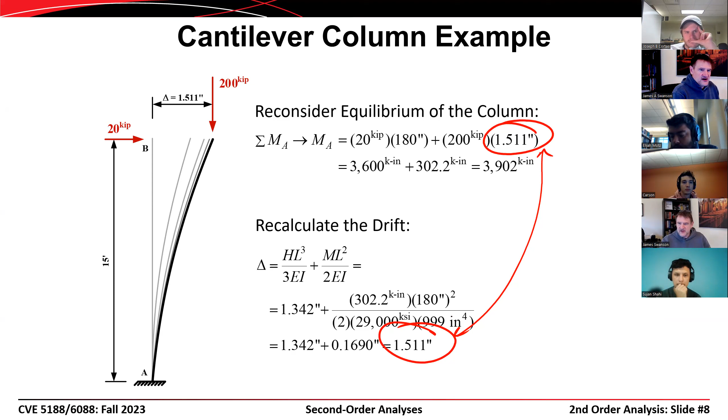And then we went on and talked about the idea of leaning columns, where we have one column here that's a lateral column, column AB, and a second column that is a gravity column or a leaning column, column CD. And so the takeaway from this was that when we have a combination of those two different types of columns in the same frame, the stability column ends up seeing second order effects, not only from loads that are directly applied to itself, but also from loads that are applied directly to the gravity columns as well.

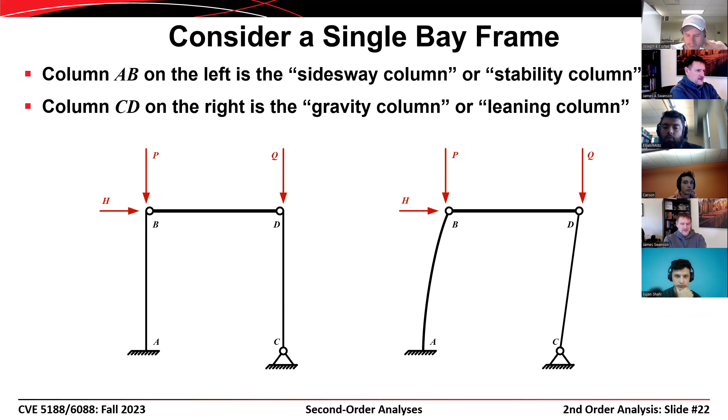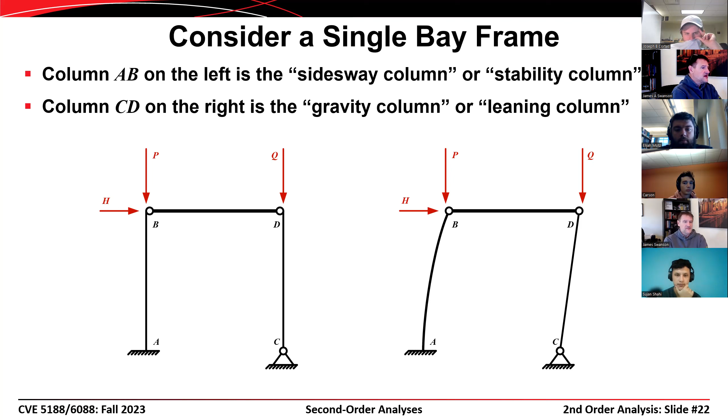And so when we look at a structure, it's important to account not just for the lateral framing, but we also have to account for the second order effects that come in from the gravity framing as well. And we went through and did some mathematics on this. We considered equilibrium of the leaning column at first, and then we considered equilibrium of the stability column next. And we figured out that the P delta effects were the same as if all of the gravity load was applied to the side sway column.

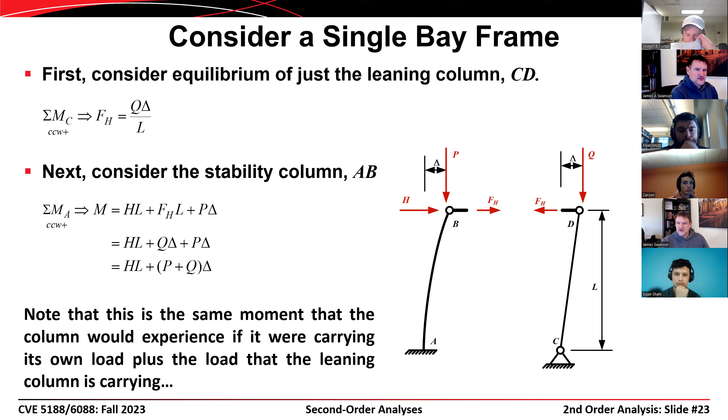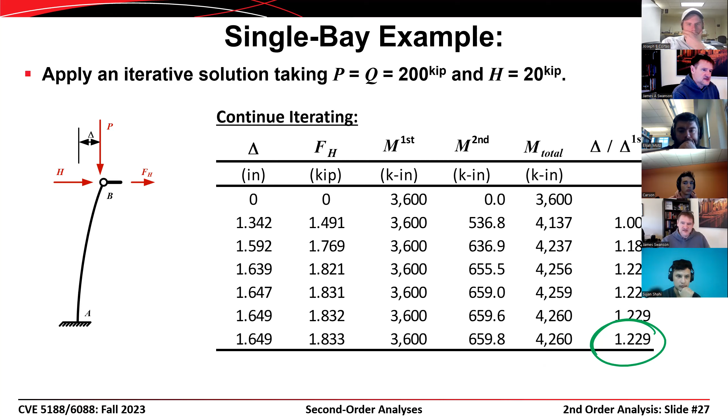And we went through this with an iterative solution and figured out that the level of second order effects was on the order of 22 or 23%. The ratio of delta second over delta first was 1.229 based on my hand calculations. Then I showed you some SAP results. Here's the hand calculations, here's SAP results with the shear deformations suppressed, and then SAP results with the shear deformations included. And we end up with the ratio of delta second over delta first in the range of 1.2.

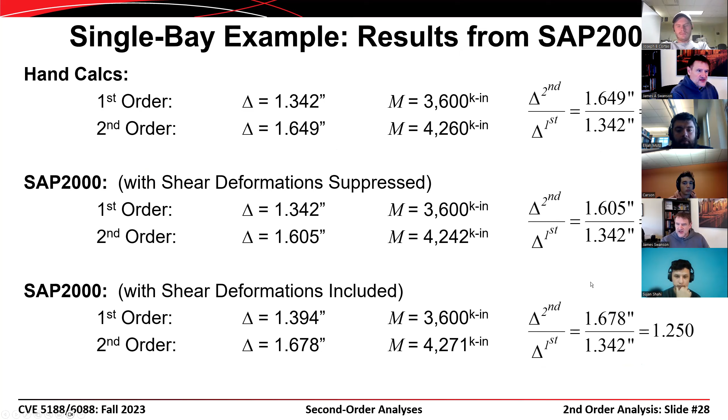So what I thought that I would do today is jump into SAP 2000 and do some modeling and show you how to account for these second order effects in SAP 2000. All right, so this is a model of that little portal frame. So let me go ahead and show you what I've got here. I went ahead and created this before class so we wouldn't take too much time.

First things first, I've got a 3D view over here on the left, and you can see that I'm bending these columns about their strong axis. So it's a plane frame analysis, and the web of these columns is in the plane of the frame.

Second, you can see that I have a fixed support down here at the base of column AB, or the base of the left column. I have a pin support over here at the base of the right column.

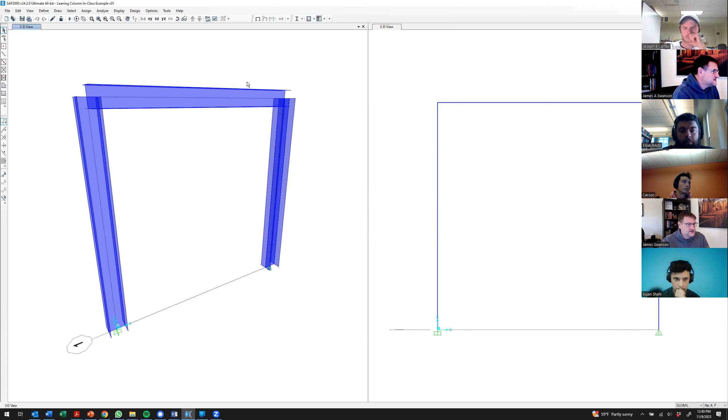Let me go in here now. I'm going to unlock this model. I had it locked when I was making sure it would run, trying to work the bugs out of the system before everybody's watching.

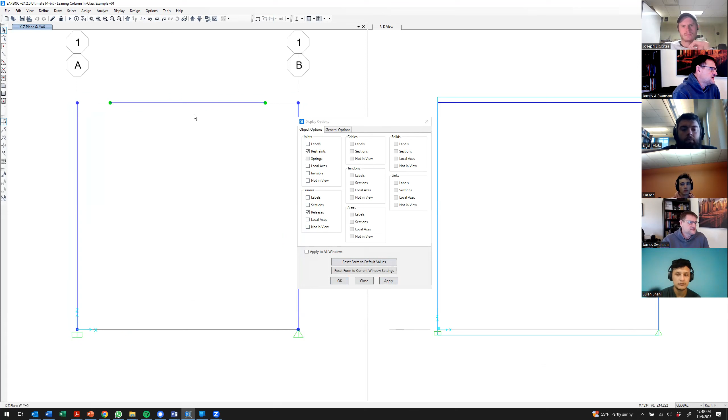Okay, let me get rid of the extrude view over here. Whoops, standard view, and I'll go back and put the releases in over here. And so you can see that I have that top beam released like would be typical in a gravity beam in a steel structure. So I've defined some loadings in here.

I've got a load pattern defined as all loads. For the sake of this demonstration, I'm not distinguishing between what is a dead load and what is a live load. I just got loads on the structure. And so the loads that I'm using are going to be, let's see, I need to bring up another presentation where I have a sketch.

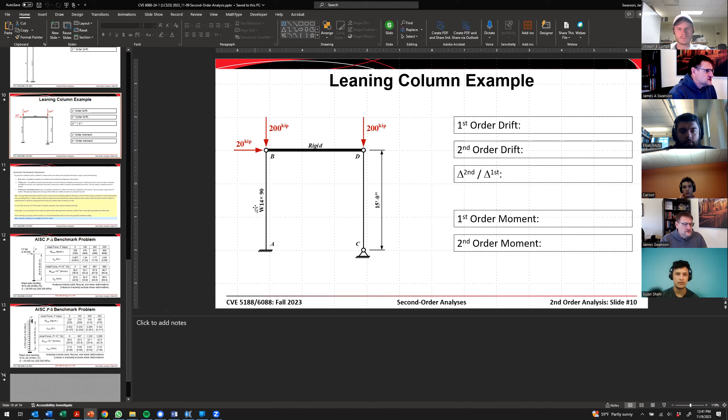So the loads that I'm using are this. I've got a 20 kip lateral force. I've got a 200 kip vertical force on both the column on the left and the column on the right. And so if I go in and display those loads, I think I already have them defined in here.

So we go to display, show object load assignments. These are all defined as joint loads. And then you can see I have those in there. So 200 kips, 20 kips. Next is to go and look at the load case definition. I have a load case here that's a linear static load.

If I go in now and run the analysis, then what you'll find is that I end up with a first order drift. There we go. Let me change to inches down here. I end up with a first order drift at the top of this column on the order of 1.394 inches. That includes shear deformations. I can go over here and plot my bending moment diagram, say M33.

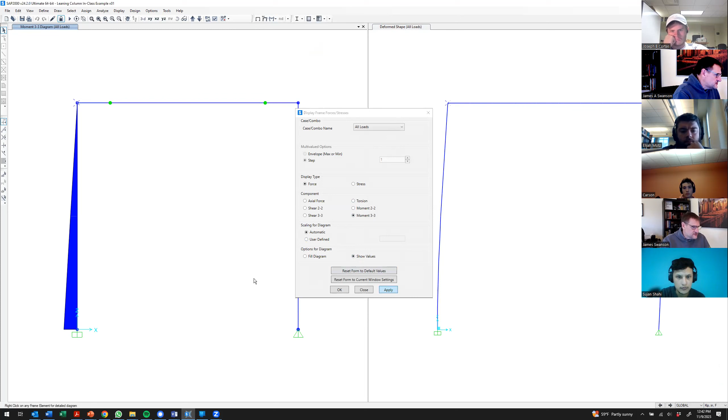Let's show the values so I don't have to. And I get 3,600 kip inches down there at the bottom. All right, so that's just a linear static analysis. That should be pretty easy for you guys at this point. Now, what if I want to do a P delta analysis?

What I'm going to do now is go into my load case definition, and I want to create a new case. I could make a copy of that case if I want to. Let's start from scratch though. Let's add a new load case. I'm going to call this all loads, and I'm going to put a dash PD in there. It stands for P delta, or non-linear case.

So I need to define what loads I want on there. I'm going to say I want all loads applied, and I'm going to use a scale factor of 1.0. Over here, I want it to be a static analysis, but it's not linear anymore. I want it to be a non-linear case. I've got P delta and P delta with large displacements. So let me go ahead and select P delta first.

You can go down here and look at this stuff. I'll show you that in a few minutes. So with that, I think everything is good. Let me go ahead and hit OK again. And now when I run my analysis,

what I can do is this. I can show the displaced shape on both sides. Over here on the left, I'll show the displaced shape under the all loads. That would be a first order analysis. Sometimes I label those as FO, just so I know that it's first order. Over here, I'll look at this as all loads P delta.

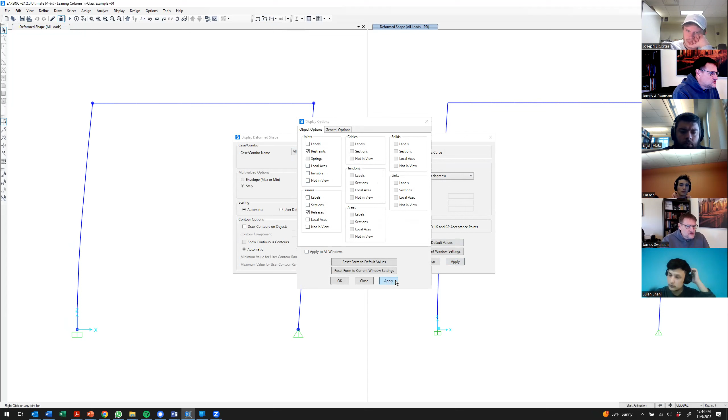All right, let me see. I can make the nodes. Why are they not showing up? Oh well. Oh, they're there. Okay. So I can do a mouse over here, and I end up with a displacement 1.394. That's the first order displacement. Over here now I end up with a displacement of 1.677. So that gives me that second order result that I was looking for.

But if we go and look here at the displacement that I have here, I get 1.678, and I only got what, 1.677? So it's not quite exactly the same. In fact, with that fifth significant figure, I can't even round up to 678. So let me tinker with something.

What I'm going to do is this. I'm going to go in and edit that load case definition that I just defined. Modify the load case. And instead of selecting P delta, I'm going to select P delta with large displacements. Okay, hit OK again. Let me run the analysis again.

All right, so now I have the same displaced shapes. Over here on the left, I have my first order results, 1.394. Over here on the right, now I have 1.678. So there's a difference between the results you get with a P delta analysis in SAP 2000 and a P delta with large displacements analysis in SAP 2000. So that begs the question, what is the difference that we get?

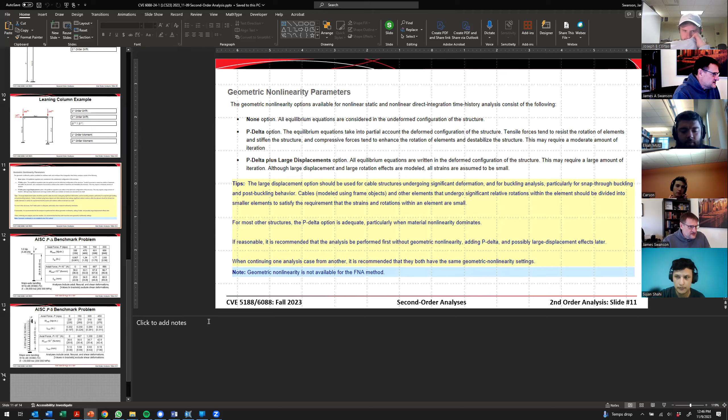And so I have this out of the SAP 2000 user manual. And so what it says is that a P delta option includes equilibrium equations that take into partial account the deformed configuration of the structure. And then if you go down and read the second one, P delta plus large displacements, it says all equilibrium equations are written in the deformed configuration of the structure.

And so this is one of those nuances where I've never really been able to get a better understanding of what's going on than what's given by this online help. I don't know what partial account means. I don't know whether that means that they go through and maybe they do one iteration and then take the deformed structure after that iteration and then re-perform the equilibrium conditions. I don't know what that means.

But it goes on and says underneath the tips there that's highlighted in yellow, the large displacement option should be used for cable structures undergoing significant deformation or for buckling analysis or things like that. But in my own practice, generally, I just select that right from the get-go, even for problems that wouldn't necessarily fall into the category that's being described there in the tip. So there is a P delta option. I usually just go directly to the P delta with large displacements option.

For the problems that I typically solve, where we're looking at smaller structures or smaller models, it doesn't really create too much of an issue with the time that's required to come up with a solution. But I could see possibly if you had a very large structure, a very large model, that it might add extra time to the solution process. Not a problem for the things that we do, though.

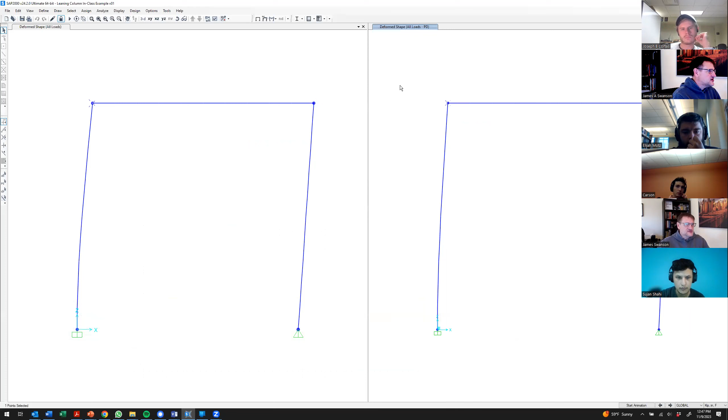All right, so what I want to do next is tinker a little bit. I want to break these loads out and show you something. So I've got them defined now as all in one load pattern, all loads. And what I'm going to do is create two new load patterns. I'm going to call one the vertical loads. I'm going to add that as a new load pattern. I'm going to create a separate one that's called lateral loads. And I'm going to put the 200 kip vertical forces in the vertical loads pattern. I'm going to put the 20 kip lateral load in the lateral loads pattern.

Oops, no, I forgot to hit that. That's one of my peeves about this program, is that it does that.

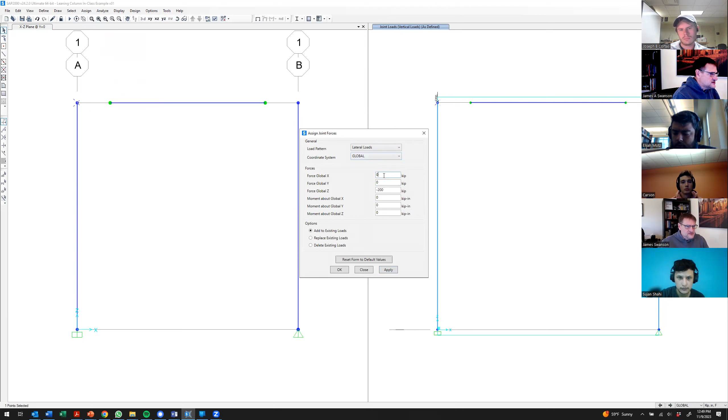All right, so let me go over here. I'm going to select these joints. I'm going to go up here to assign joint load forces. I want to go to vertical loads, and I want to assign a load of minus 200 kips in the Z direction. Apply. That's good. Now I'm going to go over here and assign joint load forces. That's going to be lateral loads. It's going to be 20 kips in the X direction. Okay.

Now, when I go and look at the load case definition, note that it gave me the vertical and lateral loads load cases. I need second order versions of those, or I need second order analyses. So let me go ahead and I'll just add a copy of that case. Then I'll go in and modify it. So I'll go dash PD. Here I'll select nonlinear, P delta plus large displacements. I'll hit OK. Do the same thing with this, add a copy of that load case. I'll come in and say PD, nonlinear, large displacement. There we go.

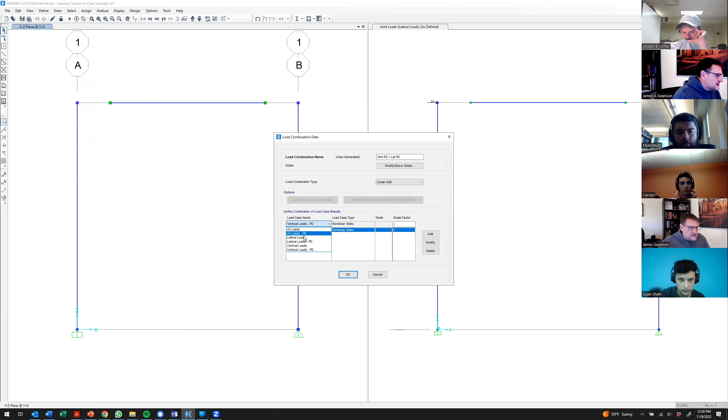All right, now I'm going to define a load combination. And I'll add this just as a linear combination. So I'll say vertical, let's keep it shorter, vert PD plus lat PD. And so we'll do this. I want the vertical PD with a scale factor of 1, and I want the lateral loads PD with a scale factor of 1. I'll hit OK. Now let me go ahead and run that.

Okay, let me define my deformed shape over here in the left-hand window. I'll look at the deformed shape under all loads P delta. That's the one that we had confidence in. Over here on the right-hand side, I'll look at the deformed shape vert PD plus lat PD and hit apply there, close. All right, now let's see what I get.

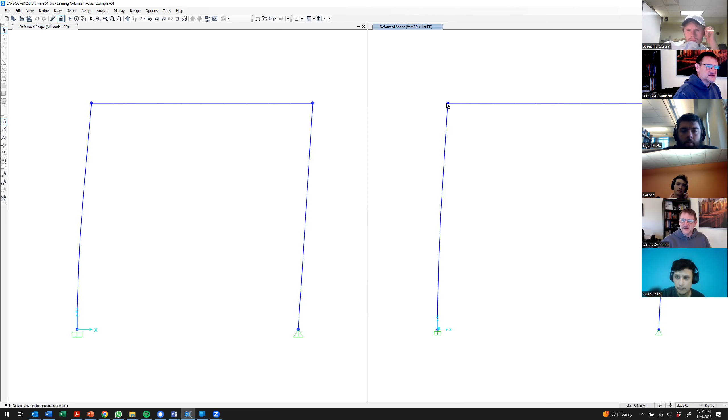So over here, I get 1.678 for my drift. That's a second order drift, and that's consistent with what we expected. If I go over here and look at the drift that I get from that, I get 1.394. And so I didn't get the drift that I expected. And the reason why is when I set up the model, I did a second order analysis of the vertical loads, and then I did a second order analysis of the horizontal loads, and I combined the results of those

two load cases. But the problem is, if you do a second order analysis with just the vertical loads on there, there isn't any horizontal displacement. There's no horizontal load to give you a delta, so the P delta results are 0. And then when you go and do the horizontal analysis, you get the delta, but there's no vertical loads on there to give you the P. So the P delta results are 0. So you end up with two analyses that are both second order analyses, but the P delta effects that you get from those two analyses are 0. So when you combine the results, you don't get the results that you would expect.

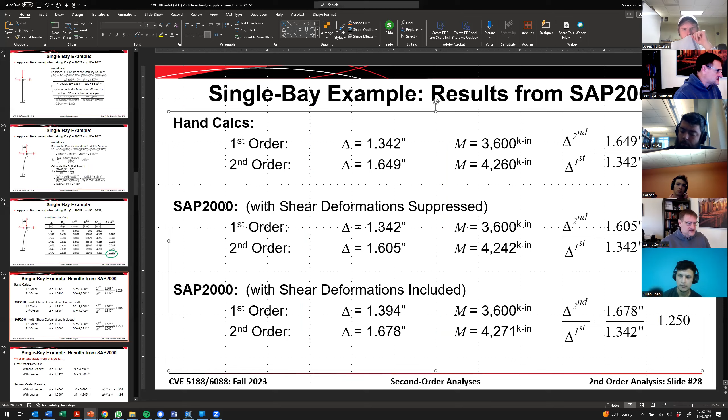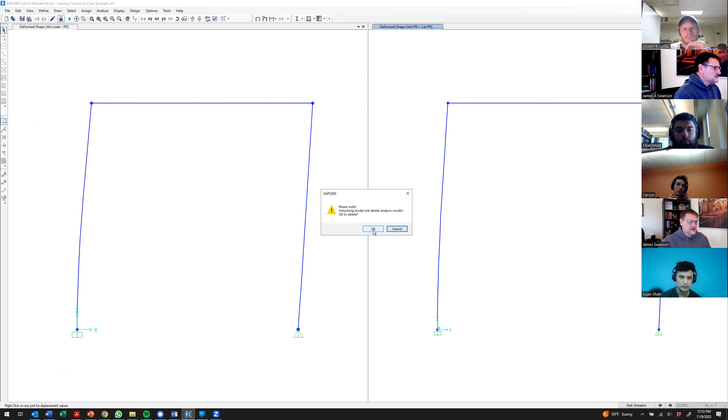All right, so let me go back to SAP 2000. And so, just to reinforce, what I just did there was incorrect. That is not the proper way of defining a second order analysis. So instead, what I would do is I would come in and add a new load case here. If I have my loads broken out in terms of lateral versus vertical, I can go in here vert plus lat. So I got my vertical loads plus lateral loads, and I'm going to go PD. And so you come in now and say, I want my vertical loads on there, and I want my lateral loads on there. I want this to be a nonlinear analysis with P delta effects plus large displacements.

And so if you were working through this in a design problem, the vertical loads would probably be dead loads and live loads, so maybe snow, things like that. The lateral loads would probably be wind or maybe earthquake forces. And so you would put in the appropriate load factors that you want from the ASCE load combinations or from the AASHTO load combinations.

All right, let me go ahead and define this. Let me go ahead and just say load case so that I can distinguish it from the load combination that I defined earlier. Let me go in and change that load combination name as well. I'll modify that, and so load com, and I'll rerun the analysis. So there we go. Okay, all loads P delta on the left. On the right, I've got vert load combination. So let's just confirm here. Over here on the left, I get 1.678. Over here on the right, I get 1.394 from the load combination, but I can go in and change that.

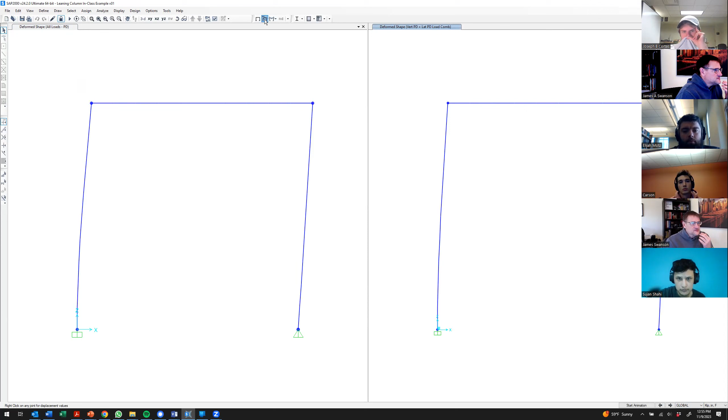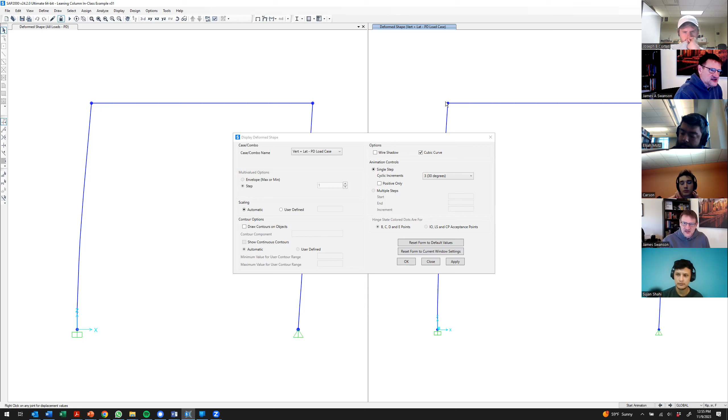So now I'm going to go, that's the load case definition that I wanted. And so if I now do a mouse over on that, I get 1.678. So when you go in and do an analysis for a design problem like this, you have to define your load combinations as part of a load case. You have to define your load factors as a load case. All of the loads have to be present in the same analysis case in order to accurately capture the P-delta effects. All right, now let's go in and look at some of the other settings that we had.

I just got a weird noise out of that computer, like somebody was going to ask a question or something.

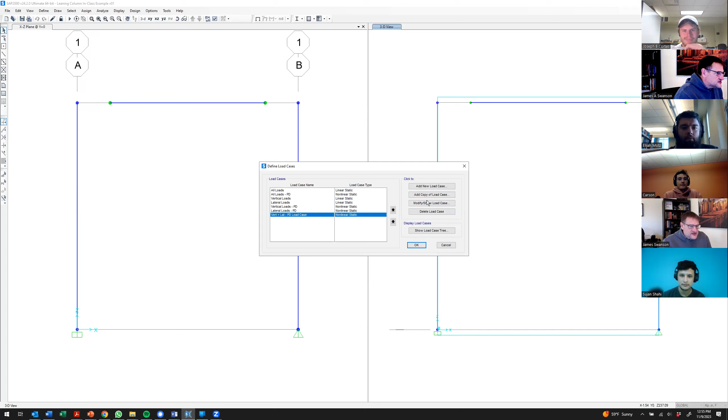All right, so let's see. I've got this load case definition. Let's go ahead and modify this. I want to show you some of the settings you have in here. So you have the load application. It's set for full load right now. And so what you can do is run this as if it were applying the full load, or you can set it so that you can apply deformations.

So you might be familiar with the idea of a load control or a displacement control. If you've done any work in experimental testing, a lot of the test machines that we use have both a displacement control or a load control. And so you can vary that or set that to some extent within here as well. And if you're using a displacement control, then you can set which degree of freedom you want to monitor as part of that displacement control.

So if you're doing something like a pushover analysis, for example, you would want to set the displacement U1, displacement in the X direction at the roof of the structure, and then you can monitor the amount of drift as a function of the horizontal force you were applying.

You can also save results only for the last iteration, or you can save it for multiple states. When we did these calculations by hand, we took 4 or 5 iterations to come to a convergence. And so you can save them for every iteration, or you can save them only for the final state. And the default is only for the final state because it doesn't want to eat up a lot of disk space with that.

And then the last one, you can show the nonlinear parameters. This gets a little bit involved here, but basically it gives you some limitations on the iterative and incremental solution that it's going to perform. And so it lets you define the maximum number of steps. So maybe something doesn't converge, maybe something has gone wrong with your analysis, and it diverges instead of converges, then it gives it a cutoff point.

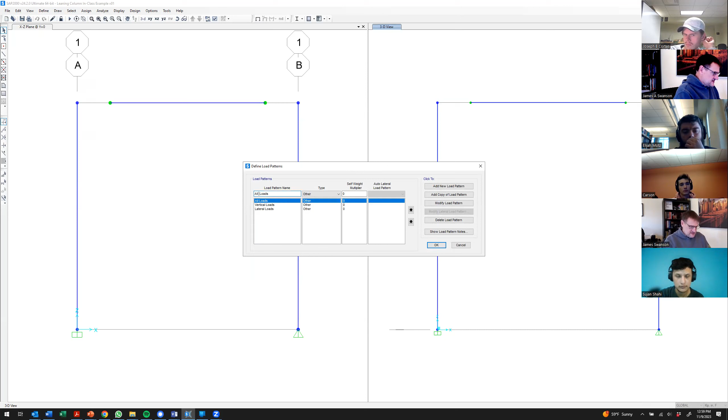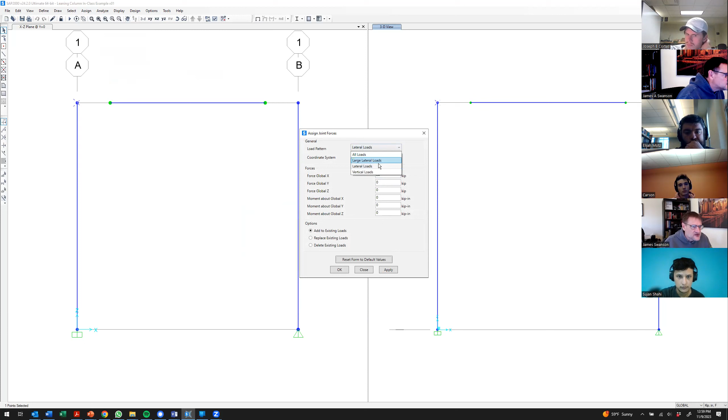All right, so there can be cases where you can actually end up with a situation where the results actually don't converge, but instead they diverge or lead to an instability. And so let me go in here and define a new load pattern. Let me call it large lat. I'll add that as a new pattern. Let me go in over here. I'm going to define a large lateral load, and it's going to be obscenely large. Let's say 2,000 kips, which would be a huge lateral force, right? So let me go ahead and apply that.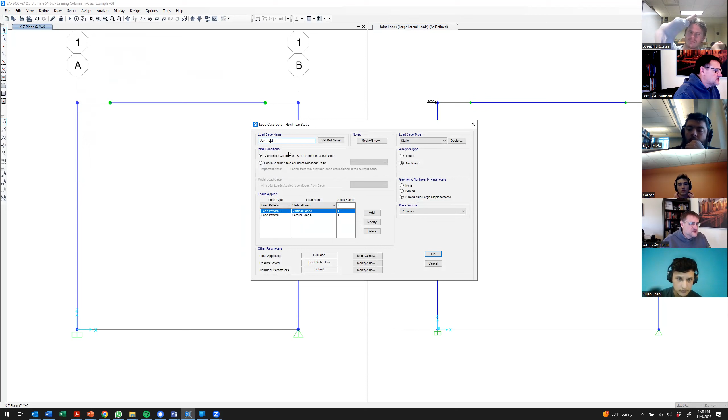Let me go in and define a new load case, and I'll make a copy of that one. So vert plus large lat, PD load case like that. And so now this is going to be the large lateral loads. I'll modify that like that. There we go. And so what I suspect is going to happen now is that instead of converging to a solution, an equilibrium state, that load is probably going to be large enough that we're going to diverge instead.

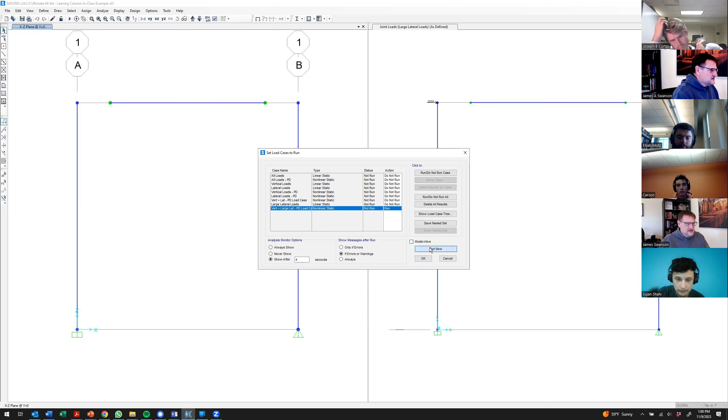So let me go into this. Let me just run that. Do not run those cases. I am going to run that case. Oops, I just hit the wrong button. Yeah, that's what I want. Now, did it converge? All right, so let's see. What do we get for a displacement there?

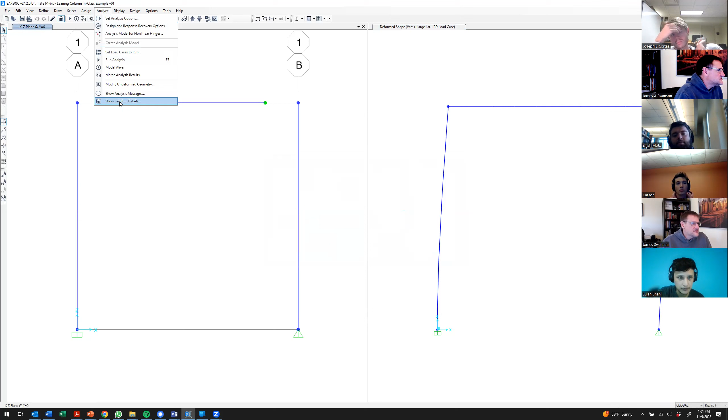Go up to show last run details. Total time 1 second. Null steps 50, total steps. It converged actually with that 200. All right, so I should have worked that out ahead of time. What's the displacement that we get there? Yeah, 109 inches. So it did converge. All right. Yeah, let me pull the plug on that. I should have had a better example that I knew was going to fail worked out beforehand.

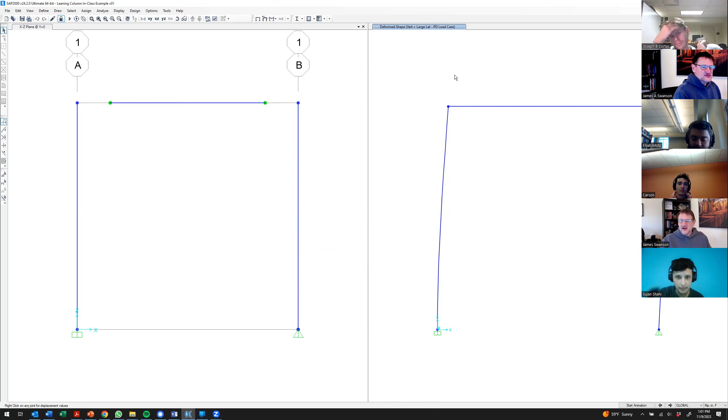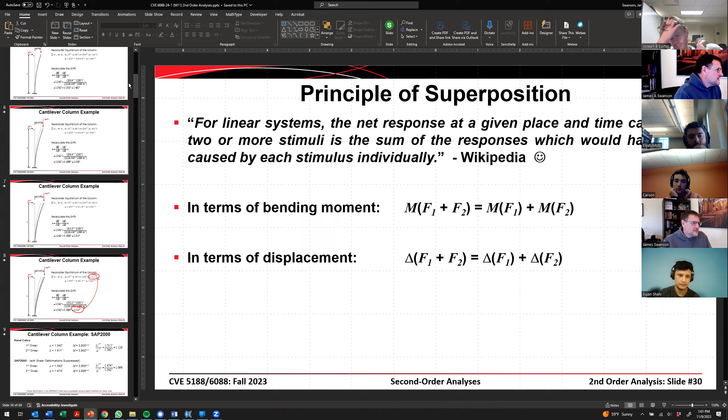All right, so what we're seeing here is an example of a P delta analysis. Now let me go back to the presentation that we're working from. I'll bring that back over here where you can see it. Let me go back to our first definitions that we started with here. And so I distinguish between a P big delta and a P little delta effect. A P big delta effect is an effect where the loads act on the displaced locations of the joints or the nodes, whereas a P little delta effect is an effect where the loads act on the deflected shape of the member between the joints or the nodes.

And so P big delta basically accounts for nodal displacements or the second order effects that accompany nodal displacements in our structure. P little delta effects are effects that accompany the member displacements or the member deformations. And so if you go and look at the AISC specification, AISC, very loosely speaking, requires you to do a P delta analysis, both a P big delta and a P little delta analysis. And when it comes to comparing the results from one analysis package to another, if you do a first order analysis, you should pretty much get the same results from one package to another. Visual Analysis should always match SAP 2000 within the limitations, right? Sometimes we have shear deformation, sometimes we don't, et cetera.

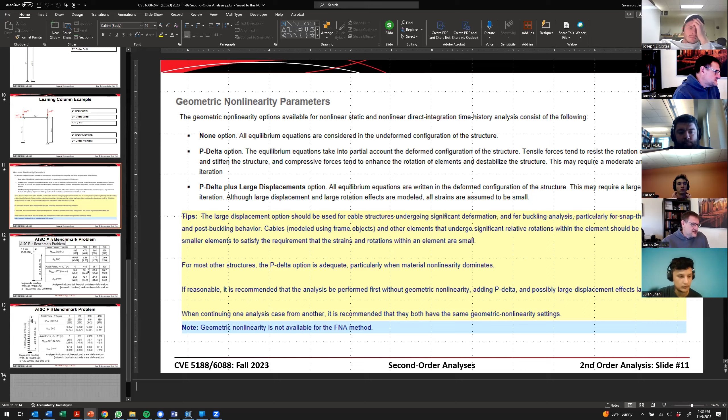When you start doing second order analyses where you're accounting for P big delta and P little delta effects, then all of these packages are not created equal. You'll get results from one package that are different than the results from a second package, even if everything else is equal. And so what AISC has done is they give two different benchmark problems that you can use to evaluate whether your software is doing a reasonable job of capturing these P delta effects. And so the particular structure that they use as a test bed is a W14x48 instead of a W14x90. It's unfortunate that it's a different shape than what I picked, but it's the same idea.

And so here they're looking at a cantilever column. This thing is almost twice as long as the column I was looking at. And so instead of having a 20 kip lateral load on it, they only have a 1 kip lateral load on it. And so then what they do is they publish the results under several different axial forces or several different vertical loads. So they have 0, 100, 150, and 200. They give you the moment at the base, and then they give you the displacement at the tip. And so what you can do is perform an analysis in your package of choice. And if you're matching these results within a couple of percent, then your package is doing a good job of capturing the P delta effects that AISC says that you have to include.

So the reason why they included multiple values for the vertical force P is because some packages will actually crash when you get a larger load. I forget exactly how it works, but I remember in years past, I've gone through and modeled this in Visual Analysis, and it might work for 150 kips, but it didn't work for 200 kips, for example. It just failed to converge. Note also that it includes results including shear deformations and results excluding shear deformations. Now, we're supposed to include shear deformations per AISC, but they recognize that not all packages are going to include those shear deformations, so they give you both sets of results.

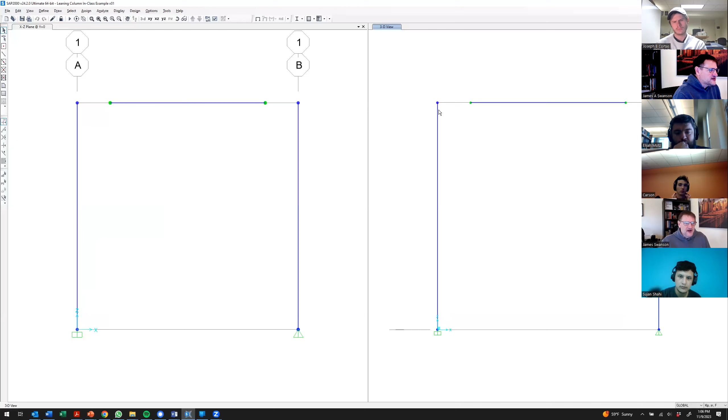So the only deformation, or the primary deformation you're going to get here, is a lateral bending of that member. And so the second order effects that you're going to get are due to the member deformations and not nodal deformations. So this is a different animal. The structure that we're modeling here is giving us second order effects that are primarily from the nodal deformations, the P big delta effects.

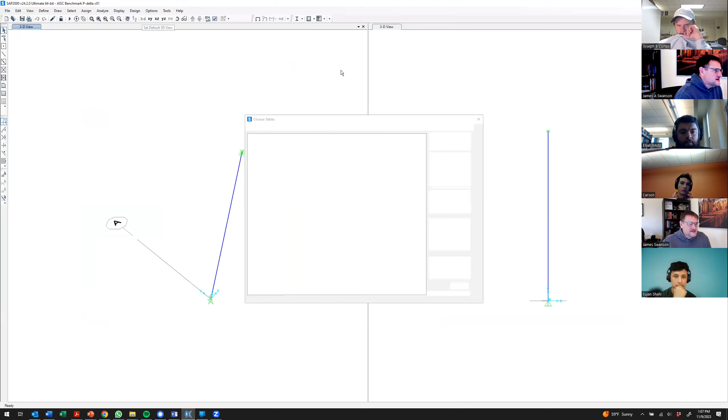I want to shift gears, and I'm going to open up a version of that AISC benchmark problem. All right, I've got this defined right here. There we go. Let me go ahead and just show you around my model. We can look at a 3D view of this over here on the left. I can show you the extruded version of this and show you that I'm bending it about its strong axis again, like AISC wants me to. And now that I've shown you that, I'll go back and put it back in a stick view again.

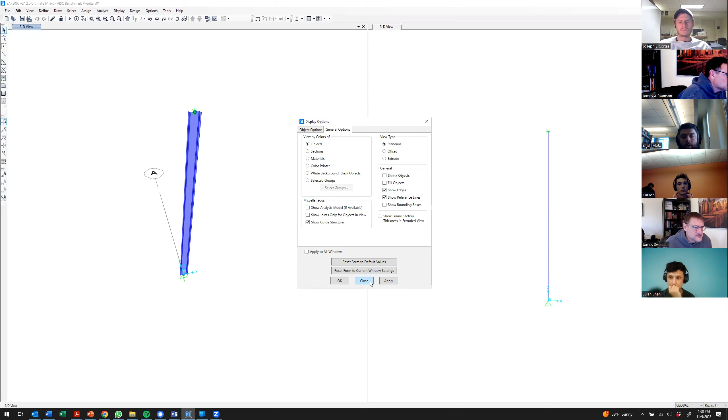Okay, I have pinned at the base, a roller at the top, so the top node is free to come down. Otherwise, the load at the top wouldn't actually enter into the member. That's important. Hit apply like that. We'll go back over here and go to the XZ view. Let me show you the loads that I have on here. Go to display, miscellaneous object loads, and we'll show load patterns. I do have two load patterns. I have lateral loads. There we go. I'll hit apply.

And so I have that lateral load. I'm in units of kips and inches, so it's 0.02 kips per inch, but it's 0.2 kips per foot. I can show you the vertical loads that I have here as well. So the vertical load is 450 kips. So I'm modeling this last case where I have a large vertical force, and then I have this lateral load of 0.2 kips per foot.

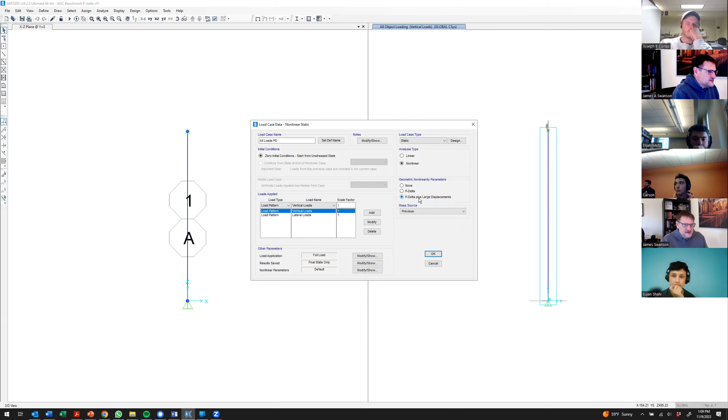Let's go and look at how I have things defined for my load cases. I have a vertical load case, I spelled loads wrong, I have a lateral load case, and then I have all loads P delta. Let me show you how I have that defined. I have the vertical loads and the lateral loads, both defined with a scale factor of 1. I have a static analysis case, nonlinear analysis type, and P delta with large displacements. So let me go in here now, and I'm going to run the analysis.

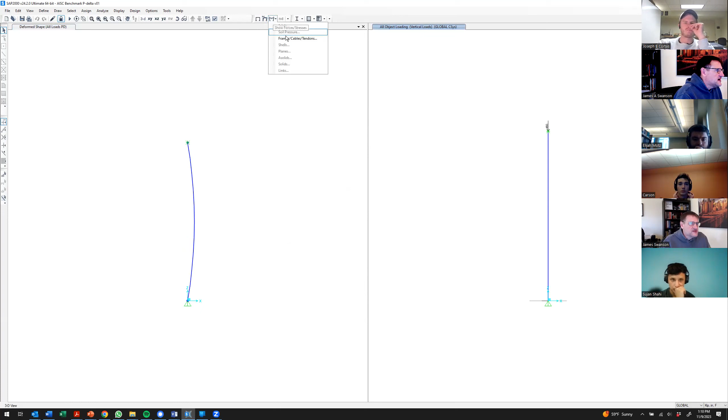All right, and now I get a deformed shape over here on the left, and I've got something over here on the right. There's my deformed shape, lateral loads. Let me modify that. Let me take my deformed shape under all loads P delta. I'll hit apply. I'm going to show the bending moment diagram. So we'll show M33, all loads P delta. All right, so a couple of things.

What's the moment that I have there? It's 334.6 kip inches. Now let's look at the benchmark case. What should I get? I should get 380 kip inches. I only got 334.6. So something is going wrong there.

Let me go ahead and right click on that. That'll bring up my diagrams box. The maximum deflection that I'm getting is 0.2779 inches. What should I get? I should get 0.322. And so I've got quite a bit of error between my SAP results and the benchmark results that I should get.

If I were walking away from this right now, I would say that SAP2000 is not doing a great job of capturing P little delta effects. And that's actually true. The way that the program is written, it's very hard for it to capture displacements that come in between nodes. So this member is deflecting. You can see that over here on the left.

That axial force has an eccentricity between its line of action and the deformed shape of the member. So it should develop a secondary moment at mid-length that exacerbates these results. But it's not doing that because SAP 2000 doesn't do a really good job of capturing displacements between nodes. Remember, we had a whole discussion about beam deflections, and if you want accurate deflections for beams, you have to break down a beam into multiple segments and put nodes at every place where you want results.

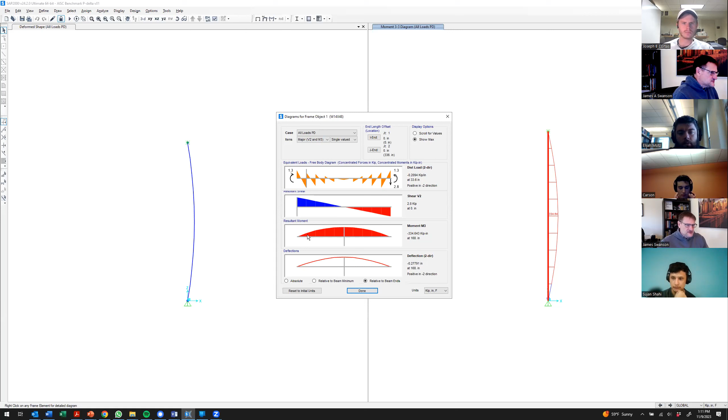So we can do a couple of things if we want better results. What we're going to do is trick SAP 2000 into running a P little delta analysis by putting nodes along the length of the member. In actuality, it's doing a P big delta analysis because it's capturing the displacement at nodes, but those nodes are really artificial nodes or automatic nodes. So what I'm going to do is this. I'm going to select that member, go to assign, and add automatic meshing.

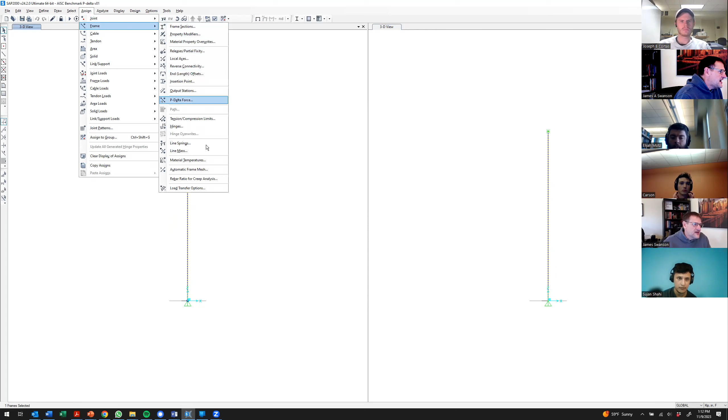Now I can put any number of nodes in here that I want. I ran a test case before class with 10 nodes in there. Let me go ahead and break that down into 10 segments, not 10 nodes. All right, I do that. Now I rerun the analysis and look at the results again. Over here on the left, I've got my deformed shape, but now you can see those intermediate nodes, and look at what I've got for my bending moments.

I've got 377.7 there at mid-span. What should I get? I should get 380, or with shear deformations, 375. For mid-span deflections, I should get 0.322 or 0.311. So let's do a mouse over. I get 0.32 inches. So I've tricked SAP 2000 into performing a P little delta analysis by putting nodes along the length of the member. It can calculate the displacement of those nodes, then perform the equilibrium conditions on the displaced locations. It's doing a P big delta analysis, but since those nodes are along the member, it's really giving me the equivalent of a P little delta analysis.

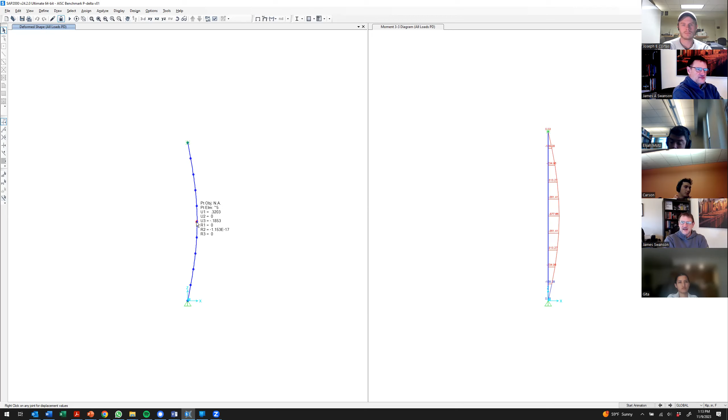So if you're doing a second order analysis in your structure and you want to capture those types of effects, it's a good idea to do automatic meshing for every member in the structure to some extent, so that you can capture both P big delta and P little delta results.

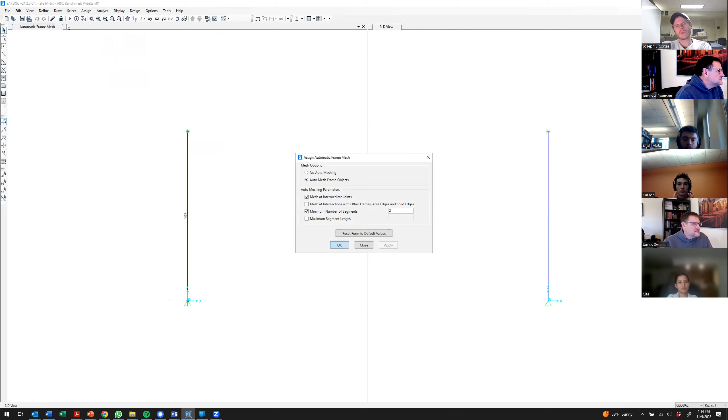Now let's do a little study here. I'm going to go back and select that member again as soon as SAP lets me. How many nodes do I really need? Let's go to frame, automatic meshing. Let's try breaking this into 2 segments and see what results I get. I'll run the analysis again. Okay, I've got 1 node at mid-span. There's my moment, 376.5, and a displacement of 0.318. Looking at the benchmark results, even just adding 1 node at the middle of that member is enough to get satisfactory results from our P little delta analysis. Makes sense to everybody?

All right, now I've got a little more time than I expected. This presentation goes into a discussion about leaning columns. I'm not going to be able to finish that in 15 minutes. So I'm going to go a little bit off script and launch Visual Analysis and show you how to do this sort of thing in Visual Analysis.

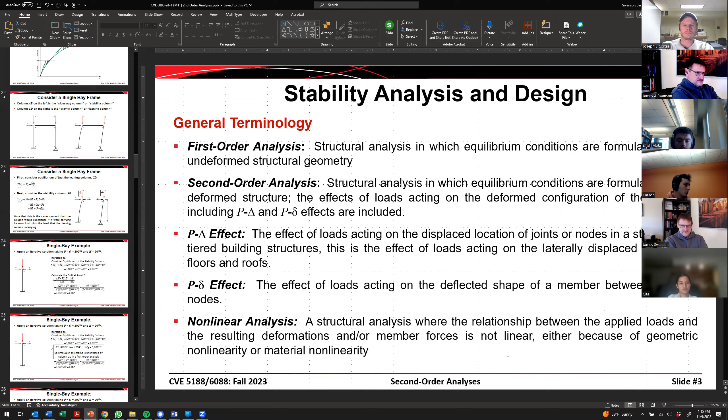Now I've got 2 structural analysis packages running. In fact, let me close SAP 2000. That might keep me from crashing my computer. I don't know why it always takes a minute for Visual Analysis to launch, even though it doesn't have to go out and find a license server or anything. It should all just be right on my computer. There we go. Thank you for joining us.

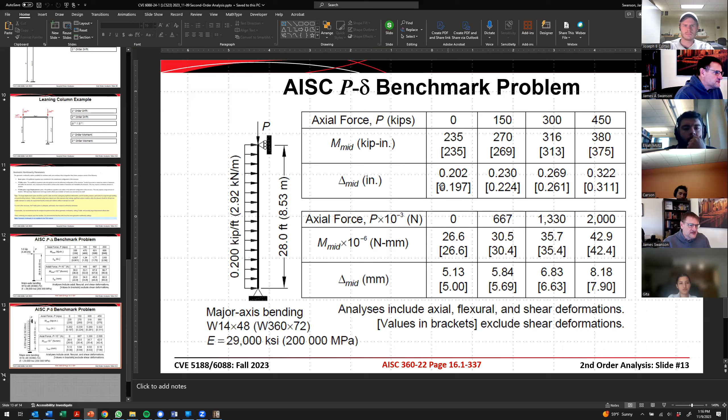All right, let me create this model pretty quickly. I'm going to do benchmark case 2 again. So I've got a W14x48, 28-foot length. Let me go up here under model and just draw that member in there. There we go, 28 feet. Okay, that made a W12x65. Let's make that a W14x48 instead.

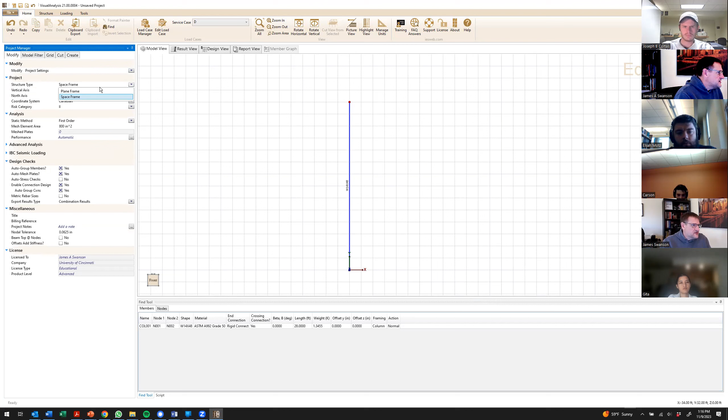Okay, let me select this as a plane frame. Let me go up here to the top, and I want to restrain that in the X direction. Let me go down here at the bottom. I want to restrain that in the X and the Y direction. Let me go up here at the top. Let me create a nodal load.

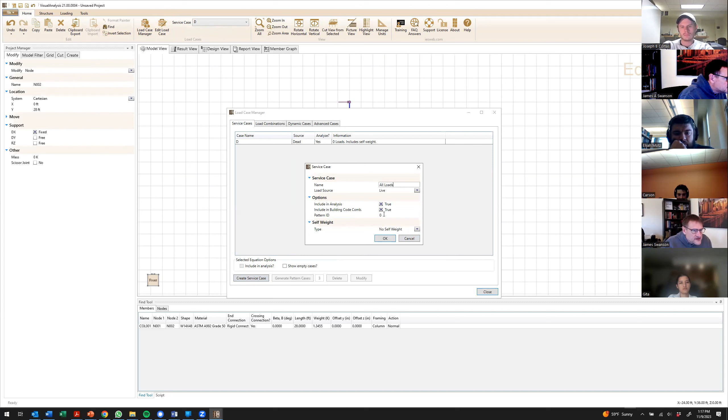Let me go to load case manager, service cases, and let me create a new service case, and I'll just call it all loads again. No self weight. It looks good. Close. Let me go up here. See, under loading, I want to apply a nodal load, all loads. It's going to be a force in the Y direction, minus 450 kips.

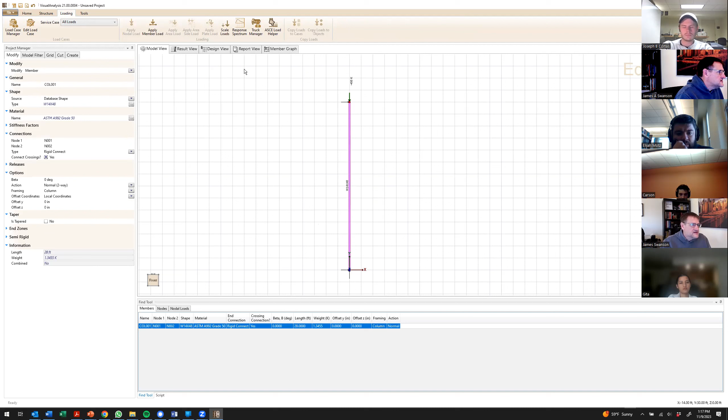There we go. Over here, let's put a member load. It's going to be in the all loads. Let's make it uniform in the X direction, and it's going to be 0.2 kips per linear foot.

All right. Now, when I do this and I want to get P delta results, I have to go over here under my project settings. Let's see, under advanced analysis, and where is it? Here we go. Under static method, it says first order. I'm going to go with a P delta analysis.

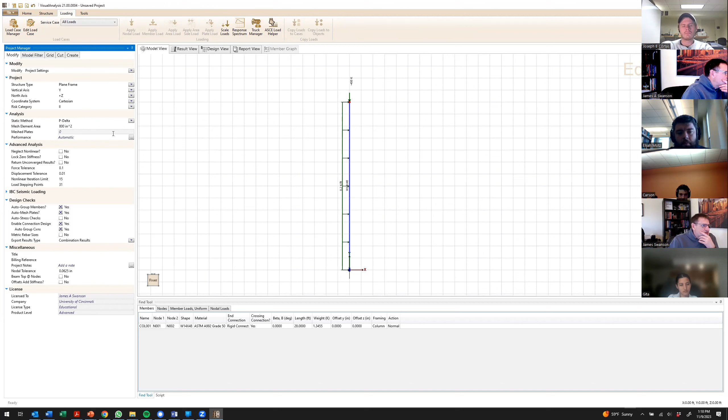So let's go to the results view. All right, what's this all about? Second order analysis, we're unable to converge. So it gave me a problem, right? Why did it fail? Well, it failed probably because I don't have any nodes along the length of this member. It can't do a P little delta analysis.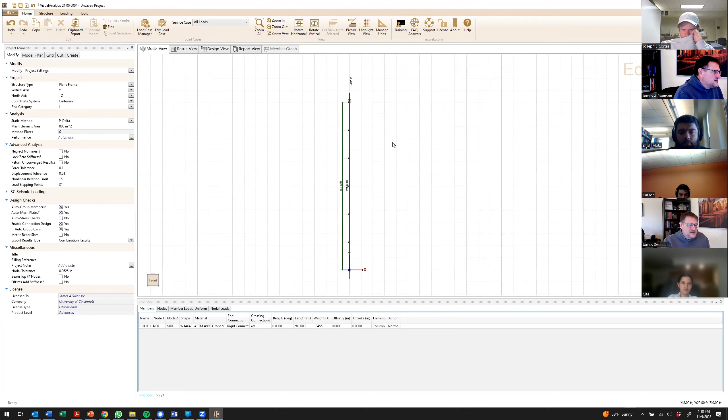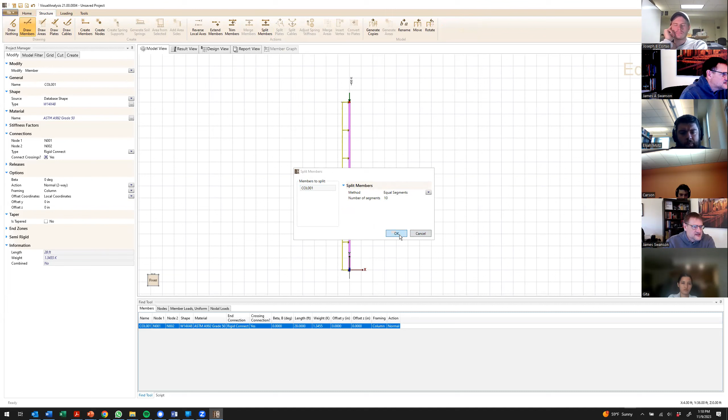So in order to get this to do a P little delta analysis like we did with SAP, I would go in and automatically mesh that member into a number of segments. Visual Analysis doesn't have an automatic meshing feature though. So what I'm going to do is go in and split that into, let's say, 10 equal segments like that. Okay, let me go to my results view again. All right, it had some issues, but it was able to converge.

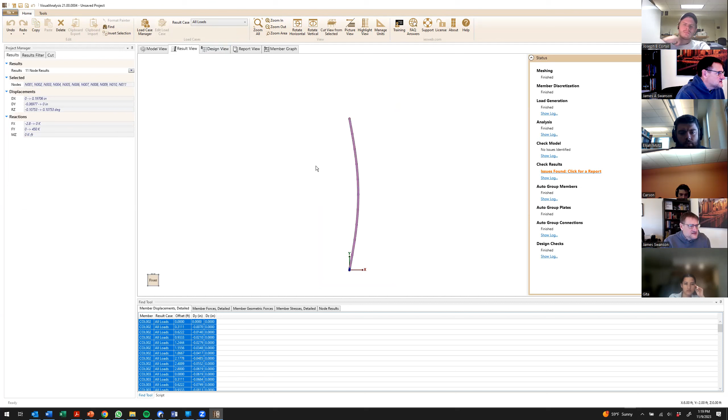Let me go to my all loads, and I'll look at the results that I have for that. So I'm going to select this, go to member graph, and so I end up with a moment there of, let's see, 19.6 kip feet. Let's see, how do I get to kip inches? There we go. So I got 235 kip inches at the maximum.

One thing that's interesting is when you tell it to do a second order analysis in Visual Analysis, it does both a first order analysis and a second order analysis. So if you want the second order results, you have to come down here to where it says all loads second order. And now when we go in and look, we actually get a moment there of 375. So if we go back and look at our benchmark case, we're somewhere around 377. That's not too bad.

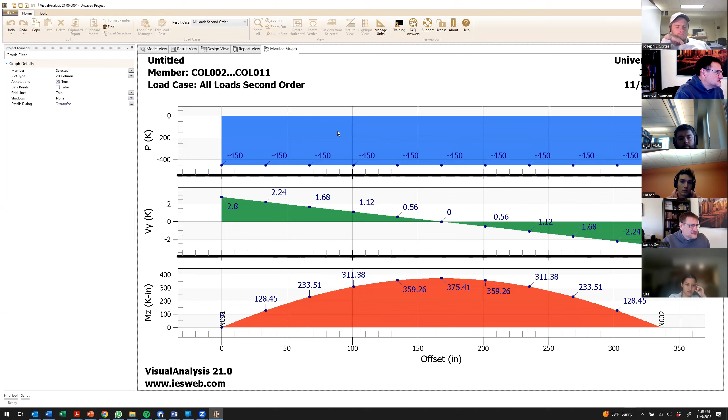Let's see, where do we get displacements? We go back over here to results view, go all loads second order, and see result filter. The maximum displacement we have is 0.3116 or 0.312. And so we're getting a displacement that's on par with that. Okay, so that's how you would do that same analysis in Visual Analysis. You select that second order option.

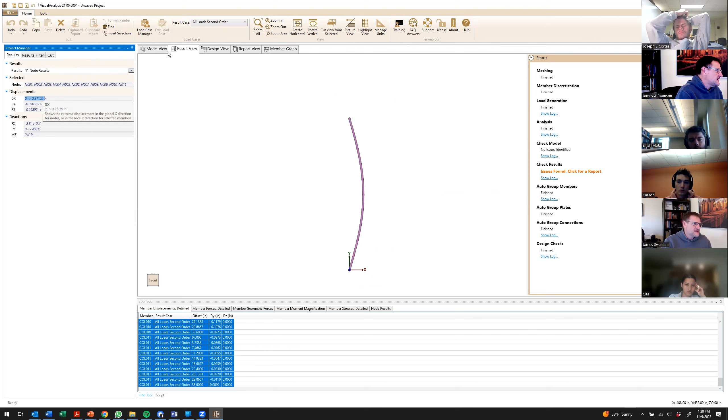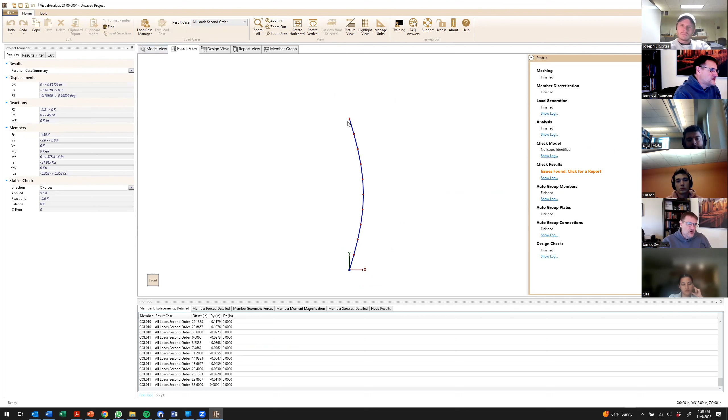Now it's not quite as robust as SAP 2000 is. If you want to get a P little delta analysis, then you actually have to go in and split the member manually. It doesn't allow automatic meshing. So now I don't just have one linear object that is meshed into 10 linear elements like SAP 2000. I actually have 10 objects in here, and that makes it inconvenient to some extent. All right.